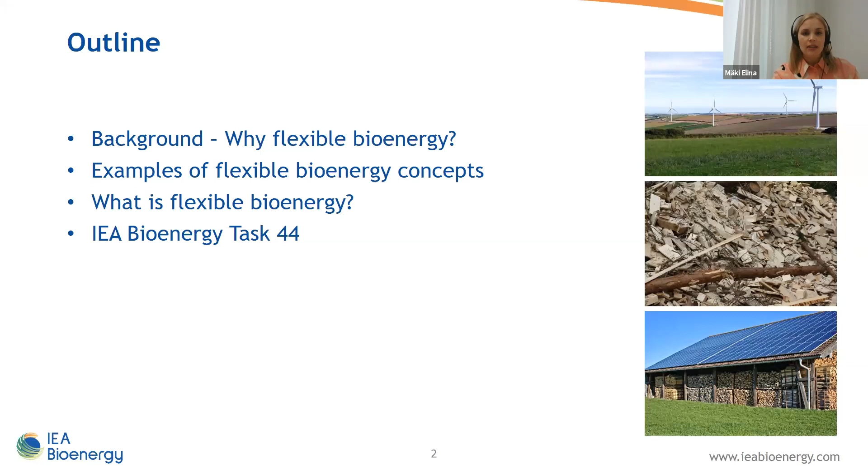So about the background: as we all know, the costs of wind and solar energy have decreased drastically over the past years. Over the past 10 years, the levelized cost of wind power has decreased around 70%, and the corresponding number for solar PV has been as high as around 90%.

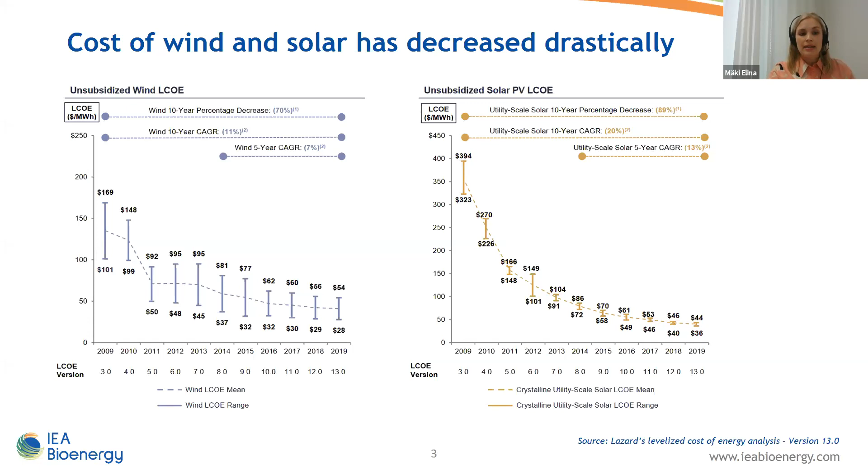The costs of wind and solar are approaching, or have even approached in some parts of the world, the costs of fossil-based generation. At the same time, the potential from renewable energy resources is really massive. This figure shows the offshore wind technical potential from the IEA Offshore Wind Outlook, and we can see that the estimated technical potential in many countries and regions is much higher than the actual electricity demand.

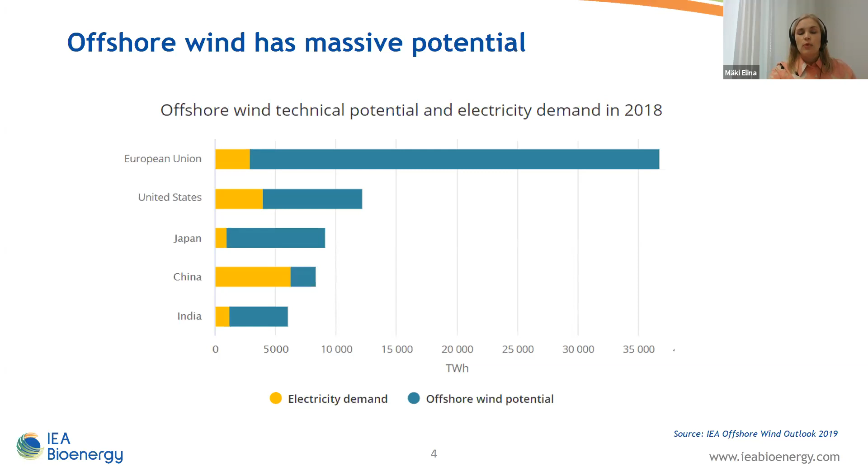So two things are happening at the same time: the costs of wind and solar power are decreasing fast, and we have a lot of resources available. But we have to keep in mind that the output from wind and solar is variable by nature and only partially predictable. What does this mean for grid integration?

In this figure by IEA, the vertical axis presents the variable renewable energy generation as a share of total power production in certain countries, and the coloring of the bars shows the grid integration phase in those countries. What we can read is that in countries where the share of variable generation is less than 10%, we are in phases 1 and 2 of grid integration, meaning the generation has no relevant impact on system integration, or we can utilize existing flexibility from the system.

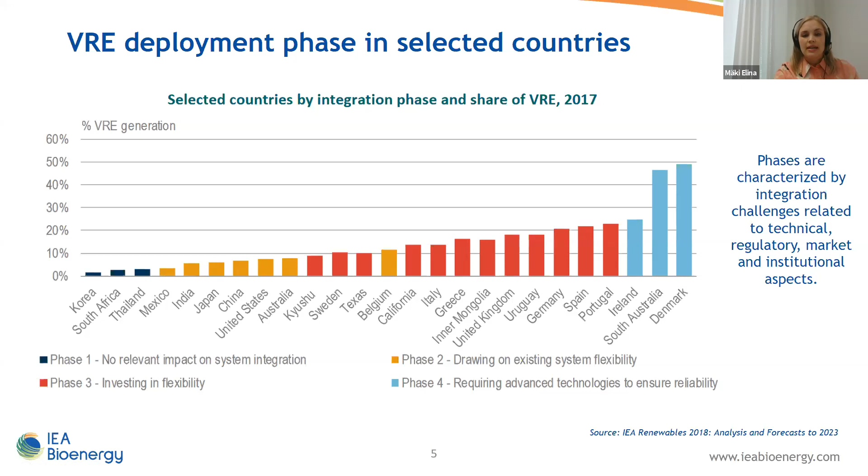But when we move to higher shares of variable generation, 10 to 20% or even 20 to 40%, we move to phases 3 and 4. This means we actually need investments in flexibility and new advanced technologies and approaches to ensure system reliability. What's notable is that this figure is from 2017, so many countries that were in phases 1 and 2 have already moved to the next phases. This integration topic is very relevant today.

We also have to remember that variability and uncertainty are not new things in the energy system. All power systems and energy systems have some inherent level of flexibility that can already balance supply and demand at all times. This is an example figure of demand in an example power system.

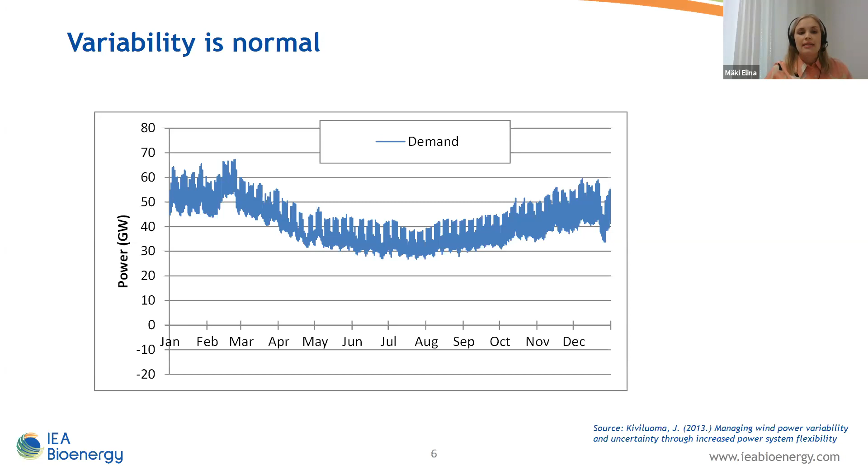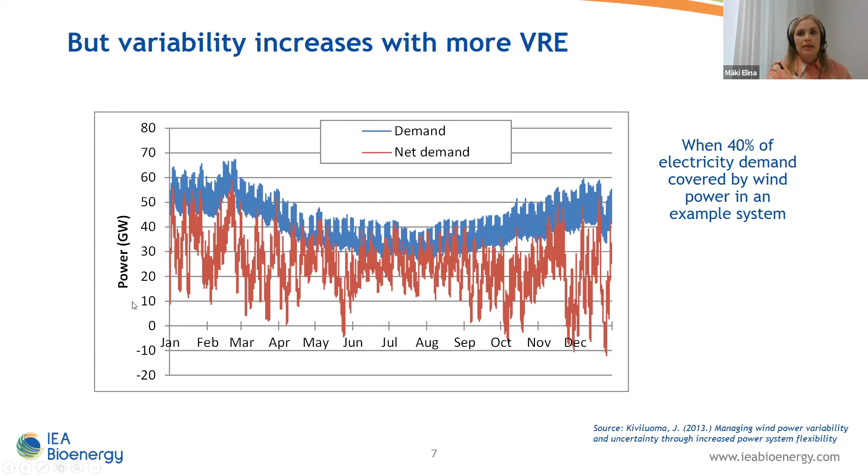When we move to a system with more variable generation, like one where we cover 40% of electricity demand with wind power, the increasing share of variable generation increases the variability in the system, which creates a greater need for flexibility. This means, for example, steeper ramps, lower outputs, and shorter peaks. This raises the question: how can we guarantee an uninterrupted supply of electricity in the system?

We actually already have multiple tools or measures for that. The power system has many components that can address flexibility today, like flexible operation, networks, flexible generation and demand, sector coupling, and energy storage. These are classified according to power sector components, with indicative costs shown, though those costs are really indicative since they depend heavily on the system and are evolving over time. There are a lot of opportunities, and likely we will need most of them to integrate increasing amounts of variable generation in the system.

But in Task 44, we are mainly interested in bioenergy and flexible bioenergy, and we can actually find it in quite many places in this figure. We have flexible generation, flexible demand concepts, sector coupling, and energy storage, where we have options to provide flexibility with bioenergy.

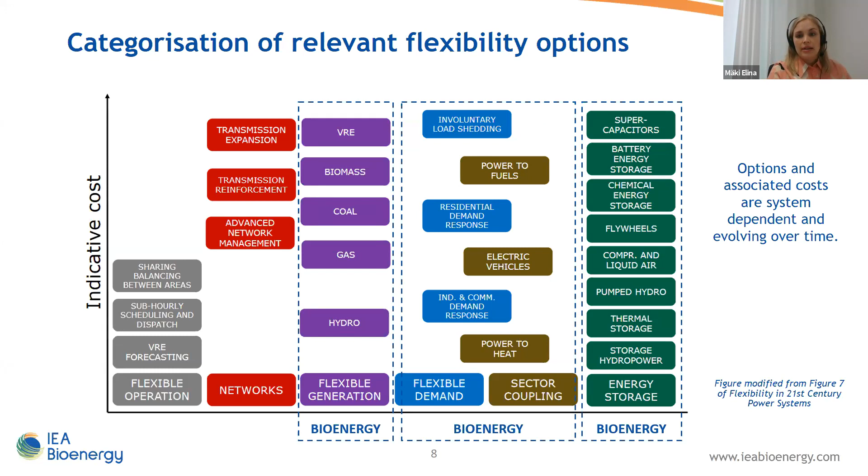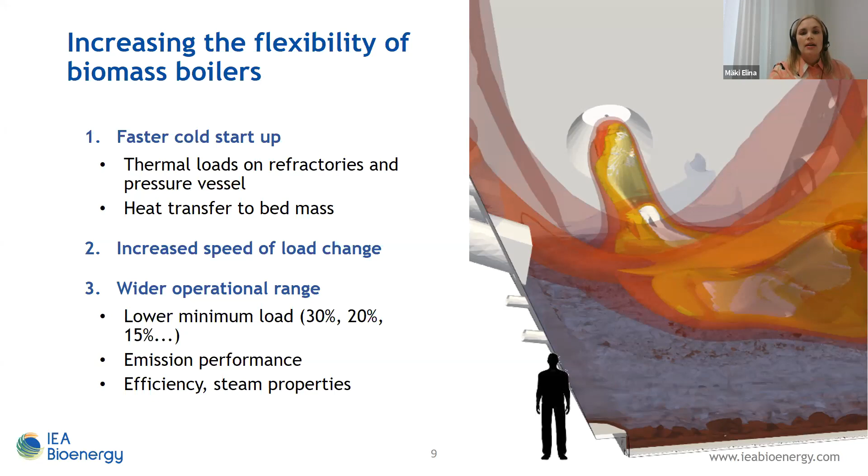In addition to technical aspects of flexible bioenergy, we should also think about profitable business models. In order to provide flexible bioenergy, we have to make the business cases economic, and we think that bioenergy has many unique features that can help in flexible provision with good economics.

Bioenergy can co-generate different products with flexible output ratios according to, for example, electricity prices. We can provide different combinations of heat, power, fuels, and other products. In addition, bioenergy is also the only renewable chemical energy source, and it's naturally easily storable both as solid, liquid, and gas. So we think that bioenergy has many features that can help provide flexibility in an economic way.

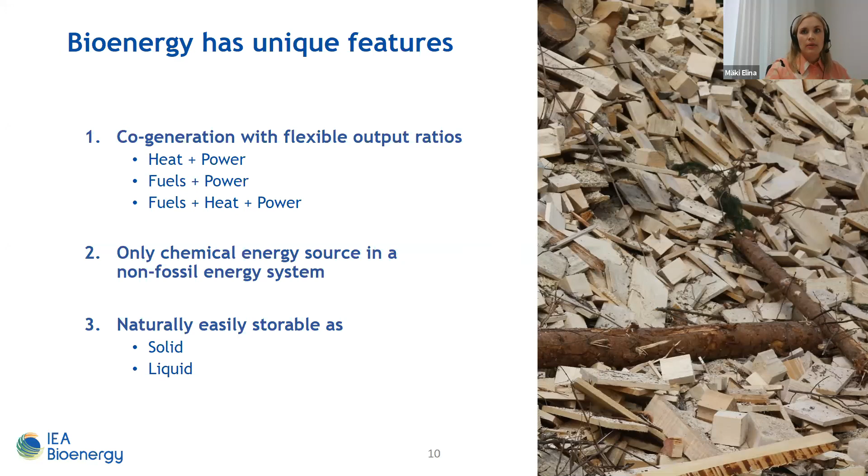Next, I will show you some flexible bioenergy concepts which we have been considering in Task 44. In these concepts, we have both the base load part, marked with blue color, and the flexible part, marked with orange.

This is an example of co-production of power, steam, and heat, where combustion represents the baseload production, and we can produce power and steam with flexible output ratio. This steam can be used, for example, for industrial drying processes or desalination, and market conditions define how much we need that.

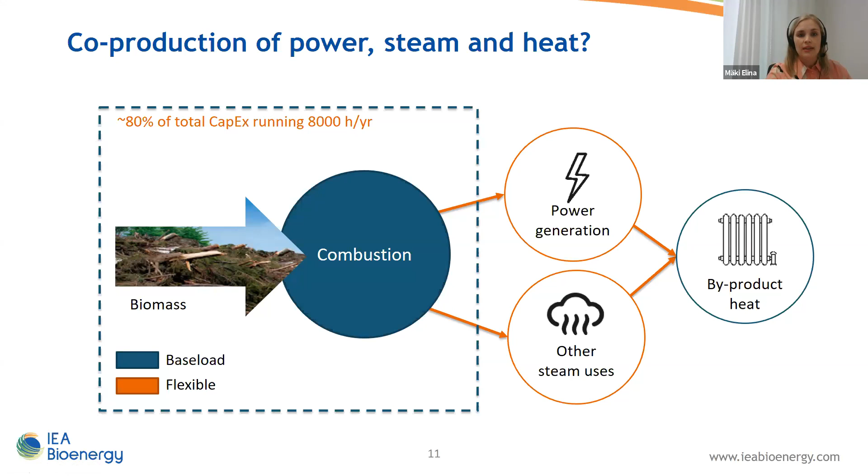The second concept is liquid fuels for peaker plants. The idea here is that we have biomass feedstock, like wood chips, which is already a renewable chemical energy storage. But if we convert that into liquid form, for example through pyrolysis, we can make it even more easily storable. With this storage, we can decouple the conversion process and the end-use application of the bio-oil, so we can produce electricity flexibly on demand.

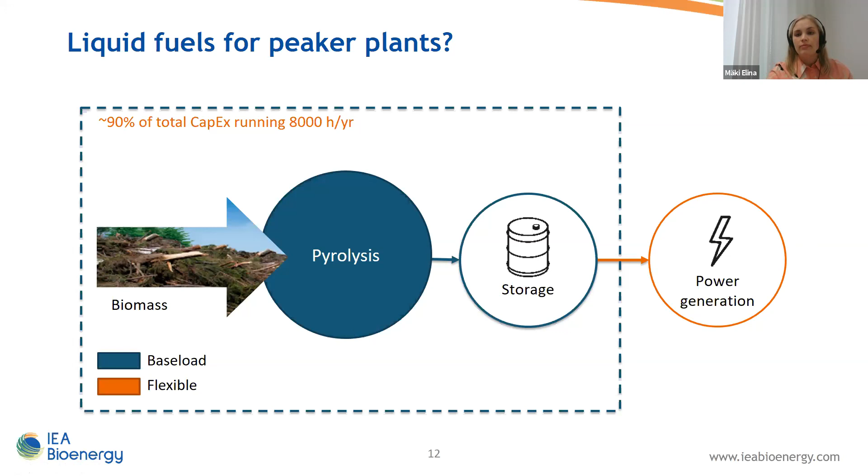The next concept is about co-production of fuels, power, and heat through gasification. Here we can produce power and fuels according to, for example, electricity price.

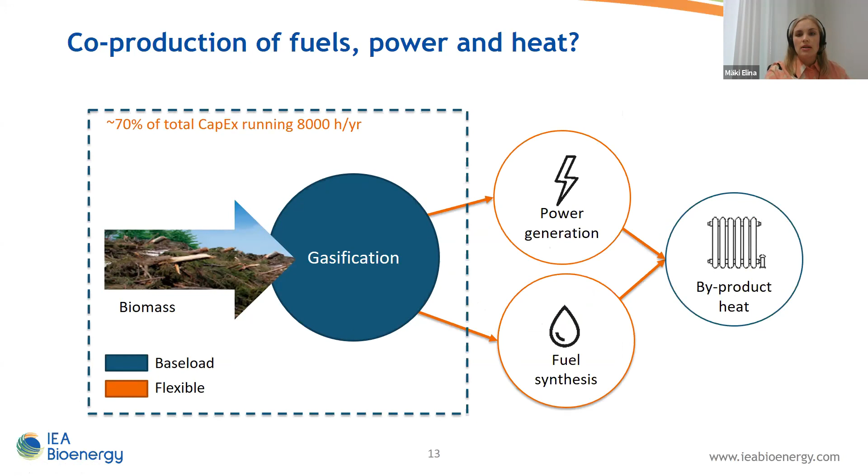The last concept is about demand-side flexibility from bioenergy. Here we are producing methane through anaerobic digestion, but we can also produce hydrogen from surplus electricity and use that hydrogen to boost methane production. That way, the methane actually works as a chemical energy storage for surplus electricity, for example from wind and solar.

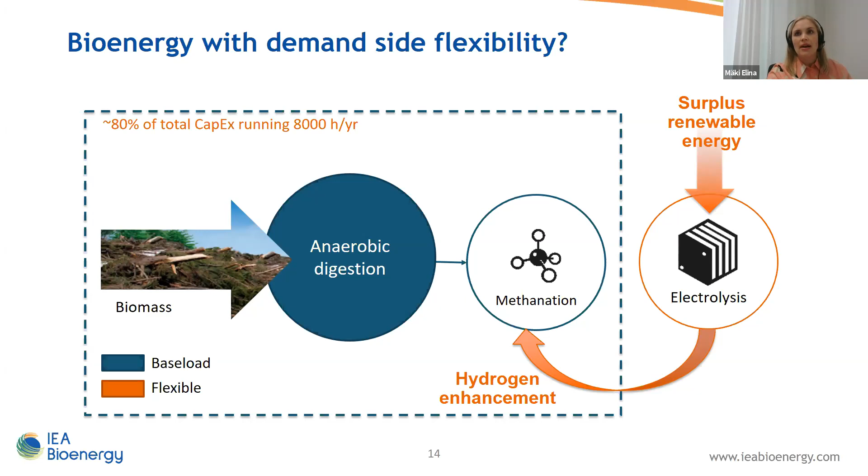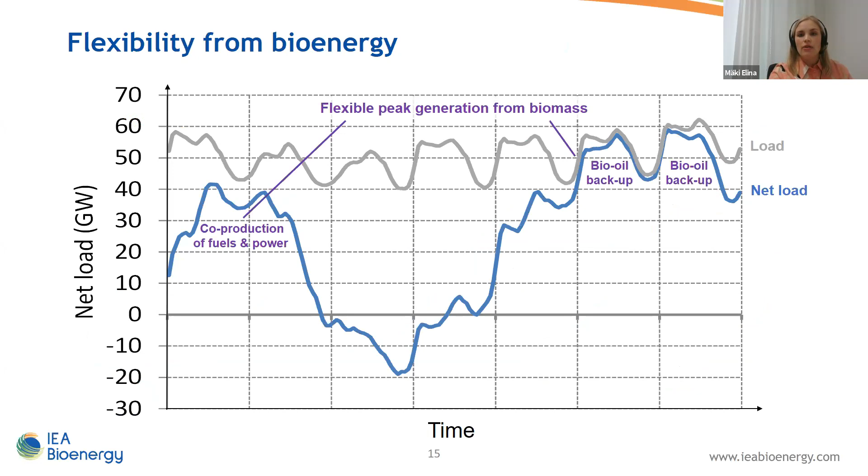As you can see from these different concepts, we have really different options to provide flexibility from bioenergy. Here you can see a qualitative representation of different options. So we can produce flexible peak power from biomass through co-production plants or in backup plants.

We can have flexible boilers, and we can produce hydrogen-enhanced biofuels. Furthermore, we can utilize the storability of biomass and then use these produced fuels during the times when we most need energy.

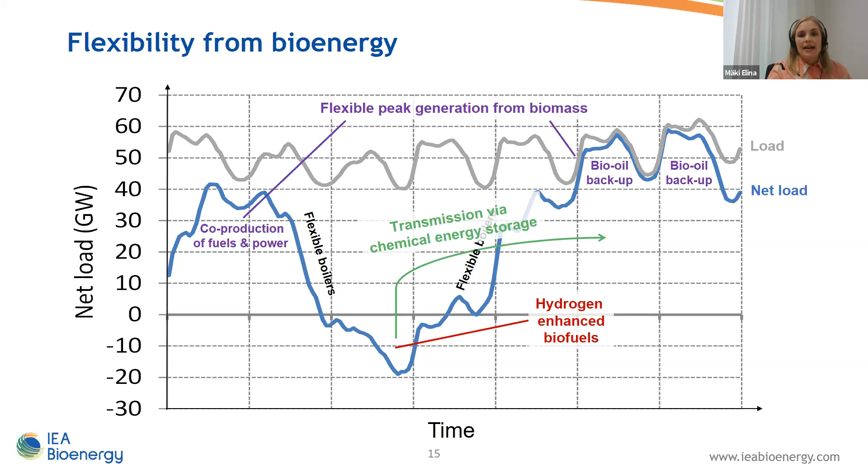As you can see, there are a lot of different bioenergy concepts, and they include very different dimensions of flexibility, like feedstock flexibility, operational flexibility, end product flexibility, and flexibility at different time scales. So what we found out is that it's really challenging to capture all these dimensions into one definition for flexible bioenergy. But we did our best, and where we ended up is a definition like this.

We have defined flexible bioenergy as a bioenergy system that can provide multiple services and benefits to the energy system under varying operating conditions and/or loads.

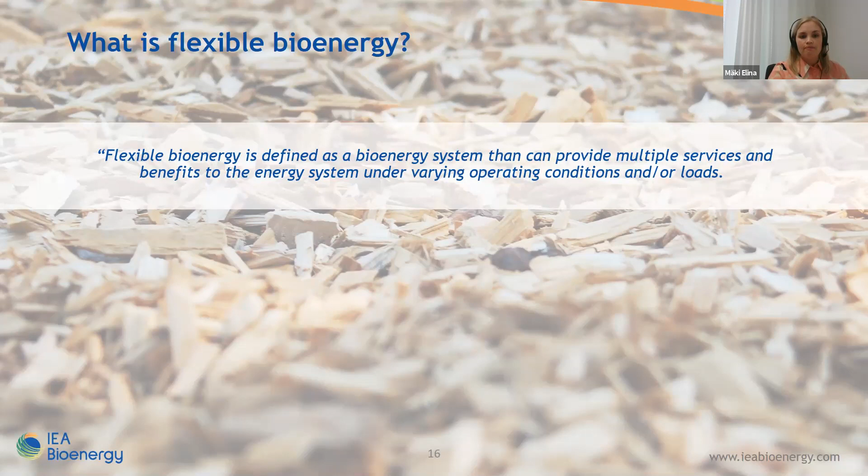This includes different examples: technologies that can provide grid stability for a power system with large amounts of variable wind and solar energy, and dispatchable production of energy and other products according to market demand.

Poly-generation systems combining the production of heat, power, fuels, and chemicals. It also includes long-term storage options, for example in the form of biofuels and biochemicals, and ancillary services to support system reliability. This is now the definition for flexible bioenergy which we are using in Task 44 to support our work there.

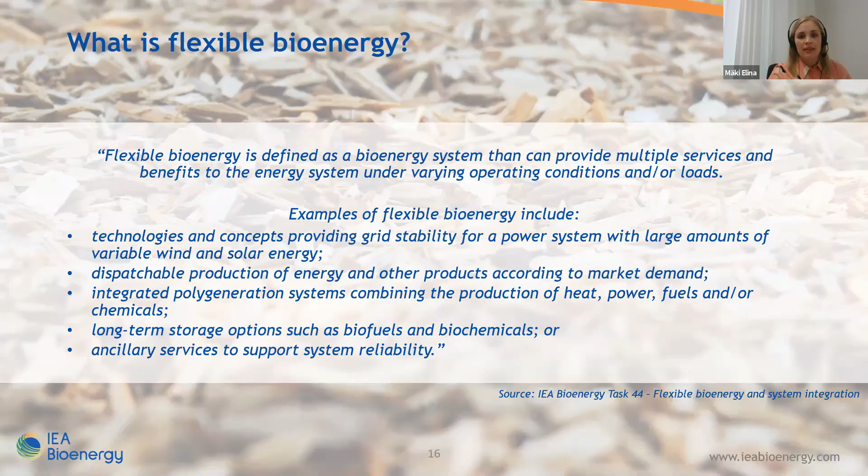Then to the end, some words about our Task 44, Flexible Bioenergy and System Integration. We are covering flexible bioenergy from different perspectives. The first one is the technical perspective, where we study flexible bioenergy concepts for supporting a low carbon energy system.

The next presentation will actually be about this, and we will soon launch a report on technical options to provide flexible bioenergy. There we will present, for example, different categories to provide flexibility.

The second topic is about acceleration of implementation, and we actually launched a report on that today: expectation and implementation of flexible bioenergy in different countries. You will also hear about the key findings of this report in this webinar.

As the last point, we are addressing system requirements for bioenergy concepts. At the moment, we have 9 member states, which are Australia, Austria, Finland, Germany, Ireland, the Netherlands, Sweden, Switzerland, and the US.

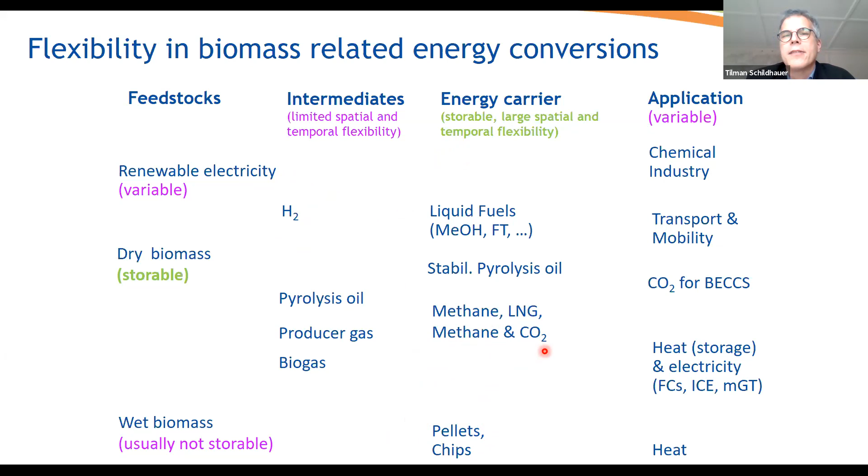For energy carriers, we see things we know quite well: wood pellets, wood chips, which are transported all over the world. We have methane or liquefied natural gas, maybe some mixtures of methane and CO2. There's stabilized pyrolysis oil, and then all kinds of liquid fuels like methanol, Fischer-Tropsch diesel, and things like that.

As Elina already showed, we have these different dimensions of flexibility. There's long-term flexibility where we want to convert bioenergy into something that can be stored as an energy carrier. But we also have two other dimensions, positive and negative, on the electricity system: either supplying electricity when the system is short, or taking electricity up when there's too much, to convert it into something storable for later use.

So these are the three dimensions, but we also have different levels. We have technologies which already exist—they work technically and there's an economic business case, so they're applied to a large extent. We have emerging technologies, usually demonstrated technically, so we know they work, but they're not applied much because there's no business case yet, or it still has to be organized. And then there are ones still under development.

I want to walk you through what is already there, what could be realized in relatively short time if we give the right financial incentives, and the things which really still need more time for technical development.

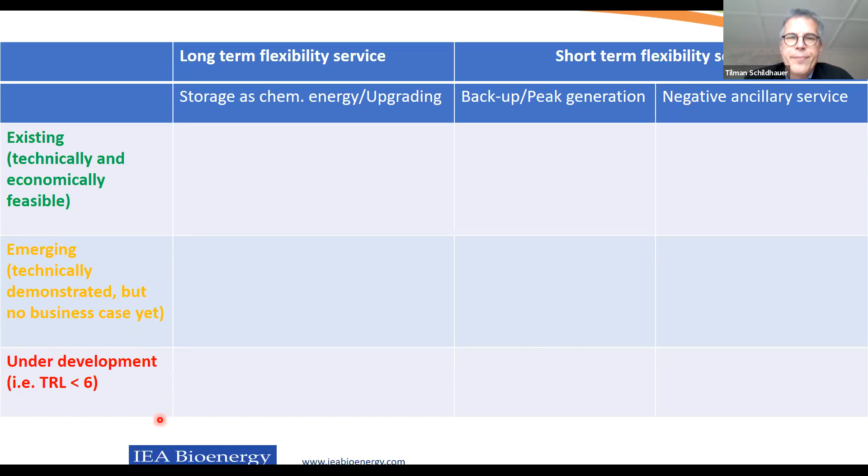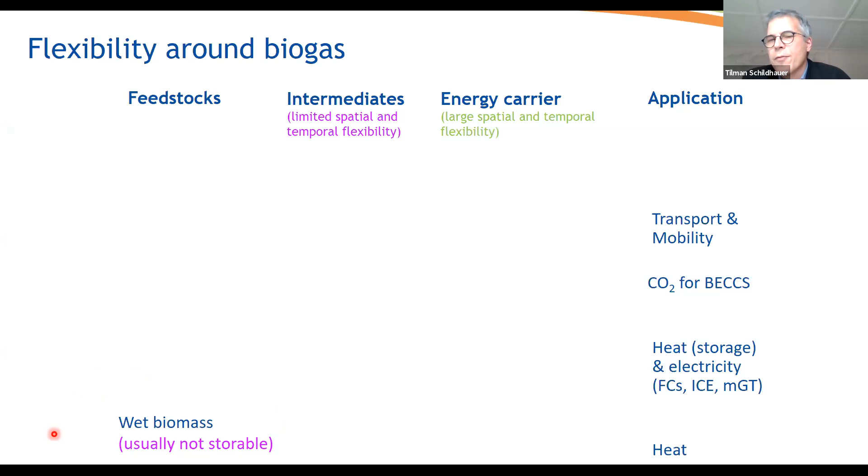Okay, let's start with biogas. We start down here with wet biomass—that could be sewage sludge, manure, or leftovers from the food industry. The first thing we do is create biogas.

This is actually something which would happen naturally anyway—if you just dump it somewhere, it might produce methane anyway. But we now do it in a kind of controlled environment, more of an agricultural one. This is how it usually looks close to a wastewater treatment plant.

We have this anaerobic digestion, and we produce a mixture of methane and CO2. This is done all over the world—we have way more than 10,000 plants. Some of these actually have storage capacity for the raw biogas of several hours, maybe half a day or so, and this storage capacity is important later to give us some flexibility.

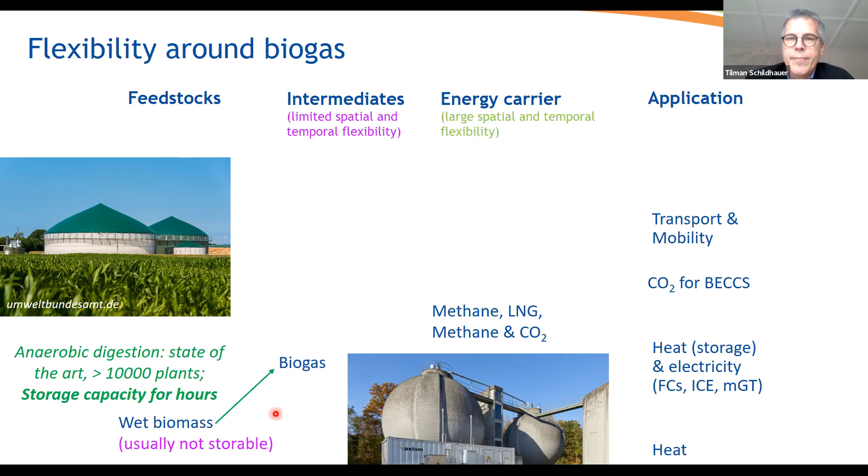Now, once we have the biogas, we can do different things, shown here. There are two things competing with each other. One is I take the raw biogas just as it is, do a little gas cleaning, and then go into a combined heat and power plant—usually something like an internal combustion engine, like this one, where we produce electricity and heat.

These things are really widespread—we have many of them, several thousand. They can ramp down relatively fast within minutes, and they're very flexible, so you can go from 0 to 100% load. That happens at many places.

Still, we have to say that most of them are not operated as flexibly as they could be technically, because for financial or economic reasons it's more attractive at the moment to run them more or less base load, 100% all the time. But together with the possibility of biogas plants to keep the gas for some hours, that could actually become a very fast implementable solution for peak or backup generation of electricity.

The other thing which is done at many places is biogas upgrading. We take the biogas and want to inject methane into the grid, because the grid contains mainly methane. There are injection specifications we have to fulfill, and the most important one is that we have to decrease the amount of CO2 a lot from the biogas to produce biomethane. There are different technologies to do that.

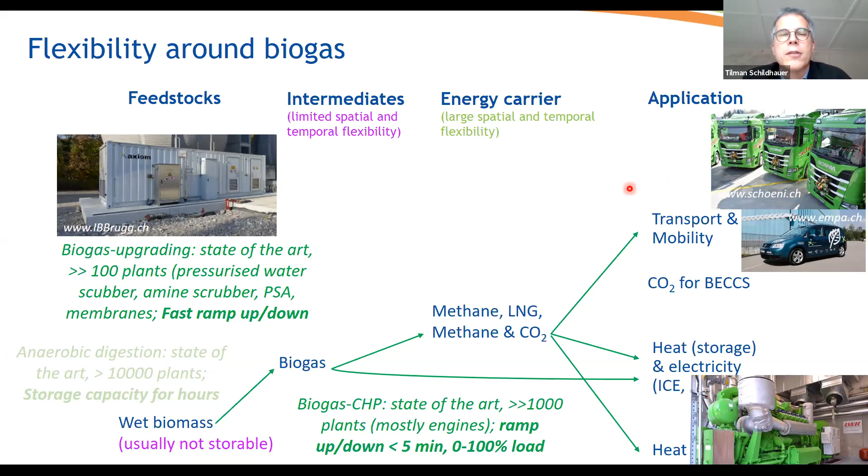If we have additional electricity that we cannot use where it's produced, and cannot transport away due to limitations in the electricity grid, we might want to produce hydrogen from it by electrolysis and add it to the raw biogas. That would allow us, instead of separating the CO2, to convert the CO2 into additional methane. So from the same amount of biomass feedstock, we can produce 65% more methane. This is quite attractive, but you need that hydrogen.

Technically it's possible, so we have several plants at TRL 8. There's a 3 megawatt plant in Germany, a close to 1 megawatt plant in Switzerland, and a similar one in Denmark. There are several plants, but not more than 20, many of them even smaller, at technical readiness level 7 to 8, both on biological or catalytic methanation. When they are warm, they can start up within 20 minutes, and they have some load flexibility, especially the biological one, which can ramp from 0 to 100 in principle.

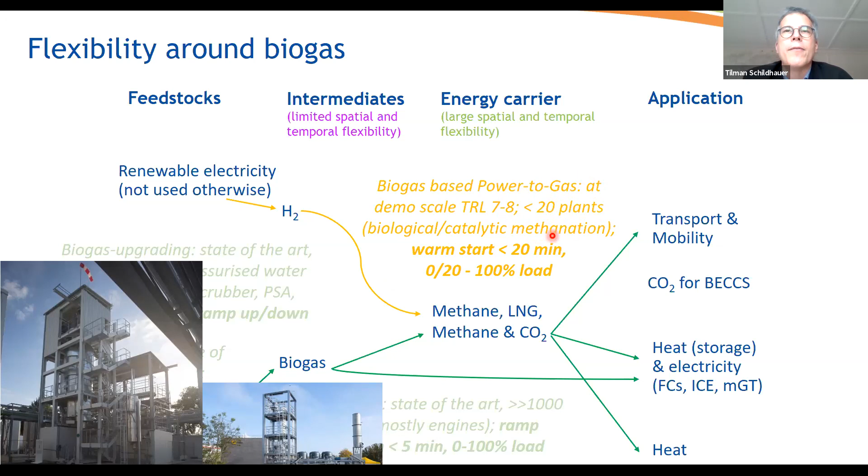What you see in yellow corresponds to the small number. It means technically it's more or less possible, but at the moment there are very few places where you can run it under commercial operation.

There's also an addition: if you take up hydrogen, that would be the negative service to the electricity grid. But at the moment, when you don't have the additional hydrogen and you want to feed methane into the grid, you have to separate the CO2, which in principle would then be available for sequestration. That's a source where you can capture CO2 and bring it to a sequestration place, achieving real negative emissions. So a biogas plant could, in winter when there's not enough electricity and no hydrogen, be used for negative emissions. But in summer, or during very windy times when you produce more electricity than needed, you produce hydrogen, and instead of sending the CO2 to sequestration, you use it to produce additional methane. This gives quite some flexibility to one biogas plant.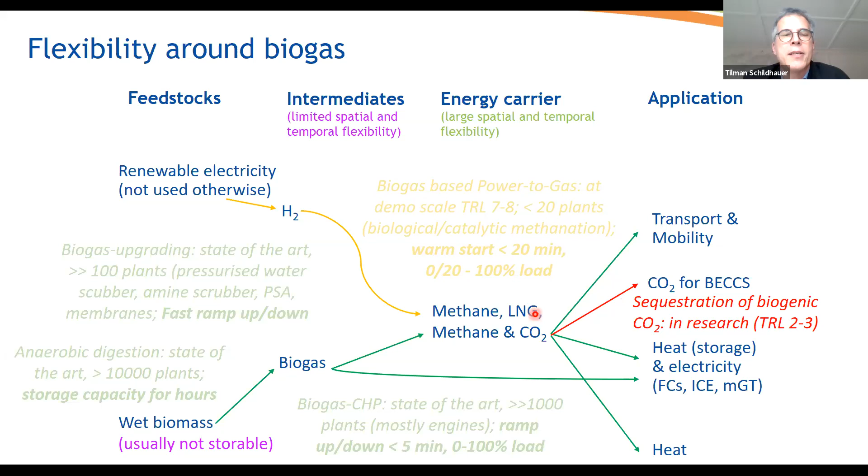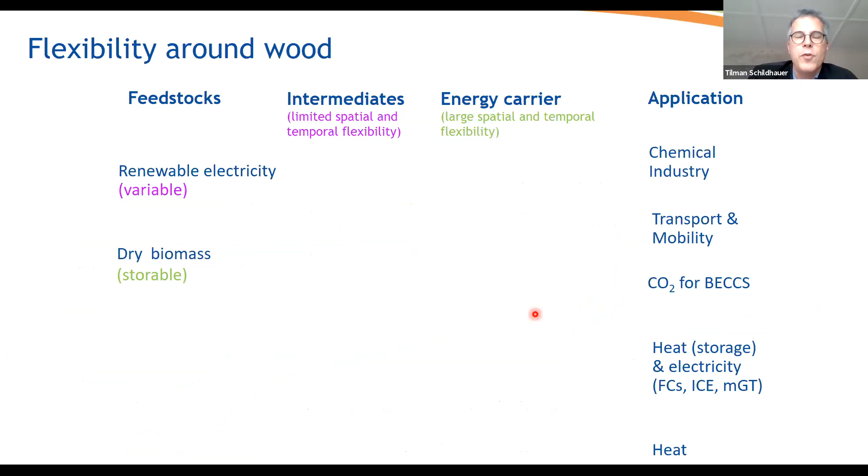That was the biogas part. Now I'd like to look at what we can do with wood, mainly dry biomass. Most of the wood used today is immediately used for heating. That's the very first use of it, and it has some flexibility in itself, because you can stop it or start it again, and there are systems for ramping the heating up and down if needed.

But if you look more into the overall energy system, what comes into the picture is combined heat and power plants based on wood. Most of them are based on combustion of wood, operating a steam turbine or an organic Rankine cycle. There are a few first plants, usually relatively small, which run on pellets, where we have gasification followed by a gas engine. So this is combustion with a steam cycle versus pellet-based gasification CHP, both examples existing in Switzerland.

What you can see, if you have a combustion part or a gasification part, they are not flexible, so you cannot completely stop their operation easily, but you can at least go to some part load. Once you have the gas, you could either burn it or produce electricity in an engine. And if you have a steam cycle, you're always able to bypass the turbine, which makes it very flexible to produce electricity relatively fast.

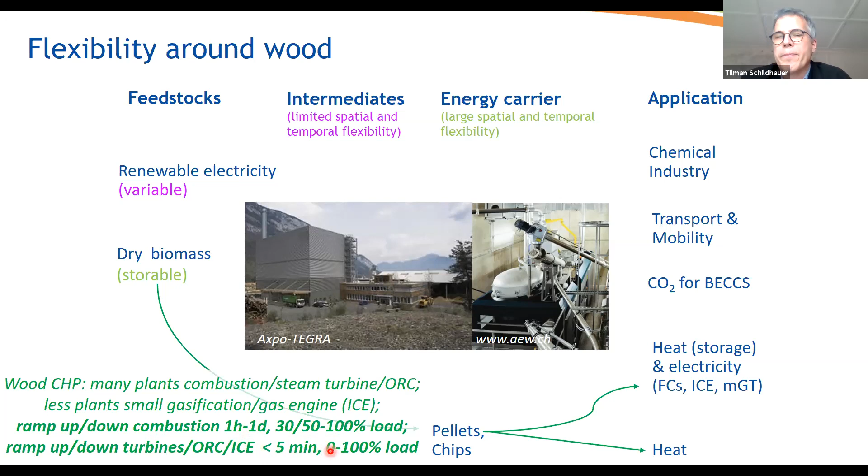Another option with dry biomass is to undergo pyrolysis. This photograph is from the Netherlands. This has now more or less reached commercial status, which is why I made this a yellowish and green arrow, because some of these technologies are more or less commercial, while others are still demonstrated but not yet commercially applied.

As I mentioned before, pyrolysis oil is not necessarily storable for too long. So the next step would be a kind of stabilization with hydrogen, mainly to saturate some double bonds and remove some oxygen from the oil, which also improves the quality quite a bit. This way you get something very stable and nicely transportable and storable, which could later be used for peak generation. In principle, we could also go from the pyrolysis oil to transport fuels, or even produce some intermediates for the chemical industry.

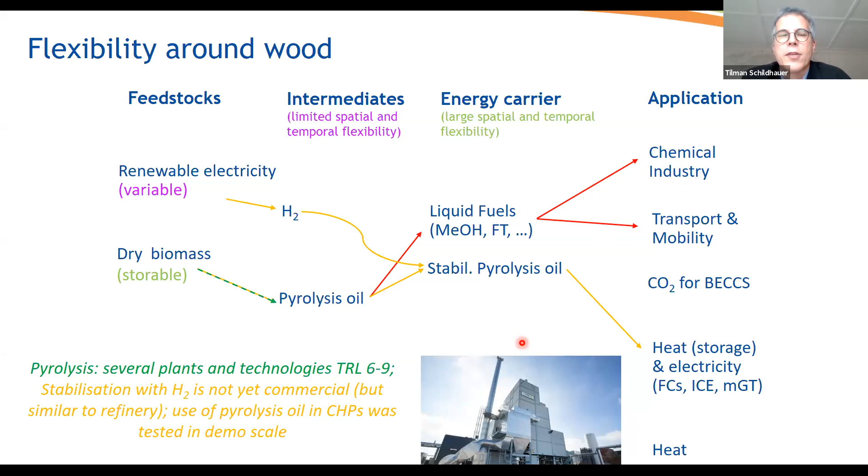Another thing we can do with wood, which is very versatile, is have it undergo gasification. Here's a photograph of the gasifier in Austria. Once it's gasified, you can operate a large gas engine. There are some of these around, some really in large scale, several megawatts, and technically they work quite nicely.

The ramp up and down of the gasification again takes a day or so, but the gas engine itself is very flexible. Most of them operate commercially, but the situation became more difficult in recent years because the wood price is going up while electricity prices on average are going down a little at certain times.

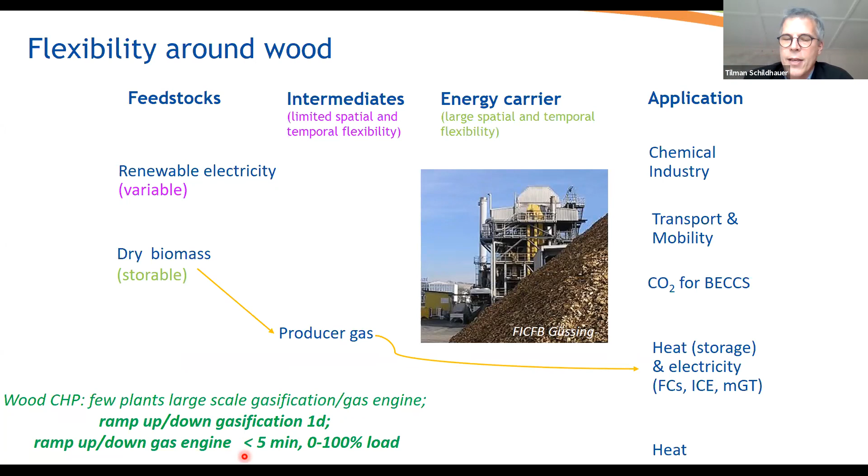But you can do more with producer gas. You can actually produce either methane or liquid fuels. For methanation, I show two pictures here: this is the Gobigas plant, unfortunately the lower part is cut away, but it's a very large plant, 32 megawatts thermal input. And this is a demo plant in Austria, around 1 megawatt input.

Again, the gasification part can ramp up and down within a day or so. Such a methanation plant, if it's warm, you can actually start the methanation within 30 minutes and produce methane which more or less fulfills the injection specification.

Another nice picture I wanted to show is this plant where we have a torrefaction step in between. We have an entrained flow gasifier, very large scale, which produces syngas that is then converted to liquid fuels in this plant in the northern part of France.

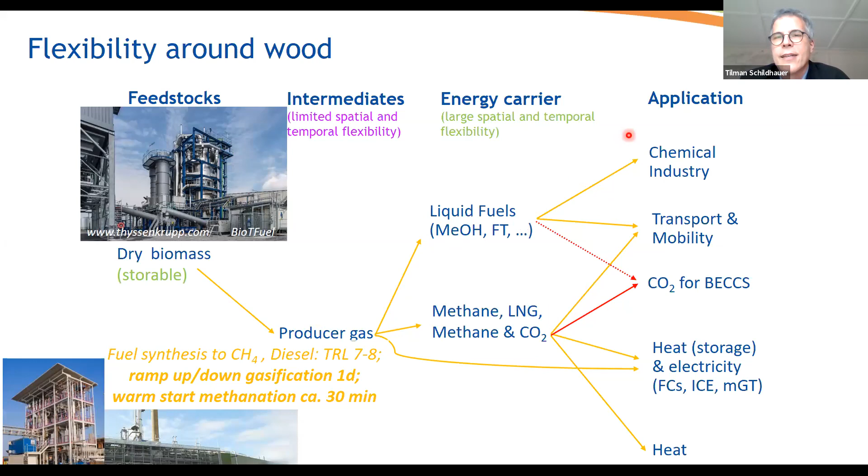From both processes, because biomass contains oxygen and these fuels don't, there's always some CO2 produced, which in principle could be used for negative emissions. Technically it's possible, but it's not yet done. All the other processes are also still in the demonstration phase. It would also be possible to enhance biofuel production, for methane, Fischer-Tropsch, or methanol, with hydrogen. It's fully obvious that it works technically, but it has not yet been tested at large scale or demo scale, so some research is still needed.

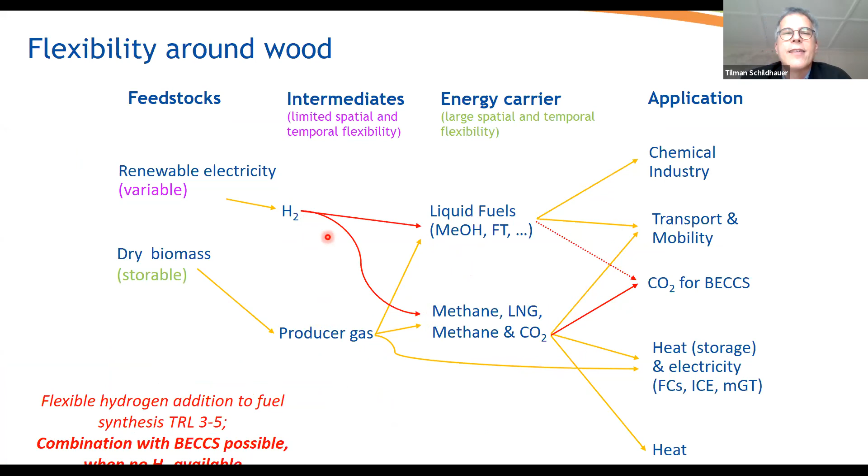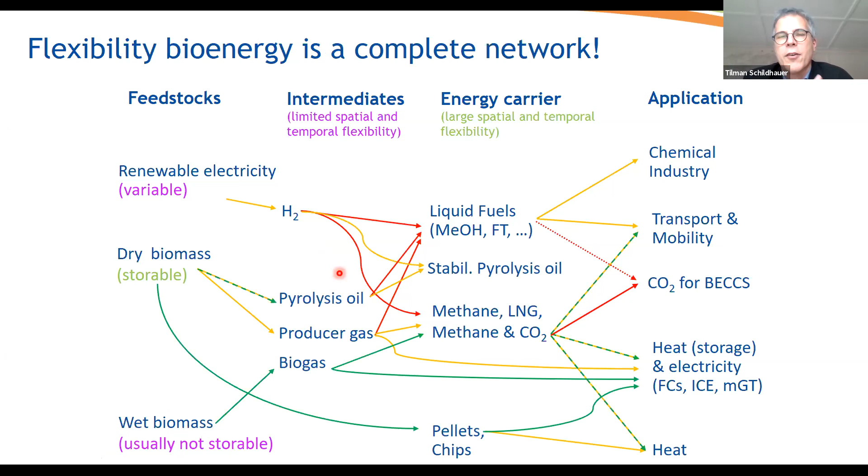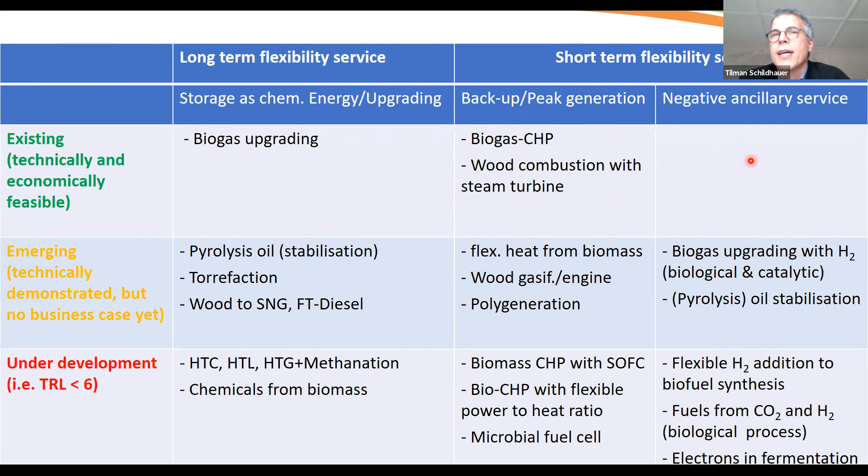That actually brings me a little bit to my summary. So we have many well-developed technologies, and most of them have been demonstrated.

Besides combustion of wood, there are only a few business cases which really work, starting with waste streams. If biogas is produced from waste streams, which you anyway would have to take care of, now you produce something useful from it, because you cannot just burn it. And producing electricity works at many places.

We have to keep in mind that in most countries there is some support scheme in place to have electricity from biomass. So it's supported financially, and if you want to use it in a flexible way, how we will need it in future, it means you need additional support. You need special incentives to really operate them in a flexible way. At the moment, most of them have the tendency to operate in baseload because it's more attractive from an economic point of view.

With wood, it's especially a problem because you have combustion as an alternative, and there are many fossils which actually can be used as alternative feedstock. So the business cases are not that easy. We think flexible hydrogen addition to fuel synthesis can make a lot of sense, but it's under development.

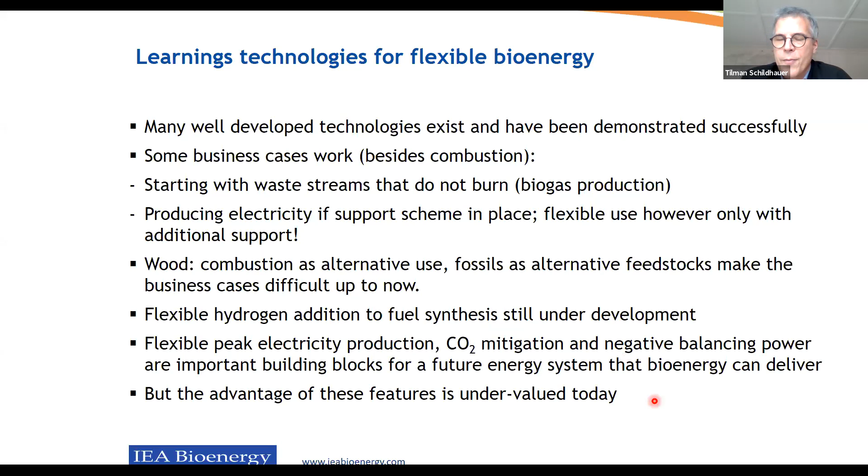To sum all that up, and this is more or less my key message, are the lower two points. So we can do flexible peak electricity, we can do CO2 mitigation, and actually even negative emissions. We can do negative balancing power. All that we will need in the future energy system, and bioenergy can be part of that. However, at the moment, these features are not as highly valued or esteemed as you would appreciate. So there are too few incentives at the moment to really make that happen in reality.

And with that, I'm at my advertising point. There will be a report on all these technologies where you can look up all the details on the different technologies. Our goal is to deliver that somewhere during spring. I have to thank all my colleagues in our own task, but also from the technical tasks on combustion, gasification, biogas, and biofuels, who were kind enough to do some proofreading and give us advice. I would like to thank you for your attention.

Tilman, thank you very much for your presentation. I think that has raised several questions, so maybe it's good to go into them. The first refers to the development status of different technologies. A specific question is when to expect gasification with capacity of 100 megawatt plus. So biomass gasification, do you have an idea on that?

Yeah, so the first thing about large scale biomass gasification, there's always a logistic problem or challenge, let's say. If you see a plant of this size, it will be somewhere in Scandinavia, somewhere with a big harbor around, so that you can transport all that wood to these places. Scandinavia has this vast experience with paper mills at very large scale, so I think this is the place we will see it first. Actually on the continent, in the middle of the continent, it's very difficult from the logistic point of view to have plants of more than several 10 megawatts. I guess this is the first starting point.

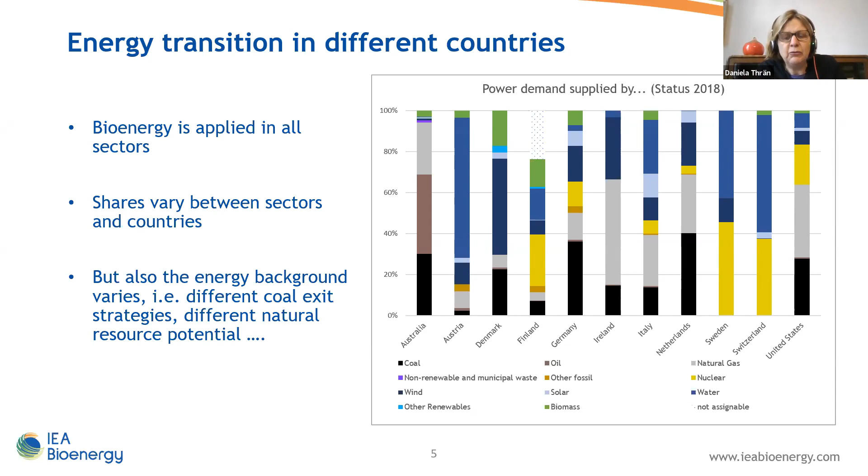We also have seen that most of the countries have coal exit strategies, some already by 2025. So there's an overall expectation that the relevance of flexible energy provision, and also flexible bioenergy, will increase during the next decade. The most ambitious coal exit strategies are already to be realized during the next 10 years.

Just to remind you, level 1 of this IEA classification means no relevant impact of system integration. Level 2 means drawing on existing system flexibility. Level 3 is investing in flexibility. Level 4, advanced technology is necessary to ensure reliability, and level 5 is when we have a fluctuating or variable renewable energy surplus for days and weeks, or maybe in the longer term even seasonal.

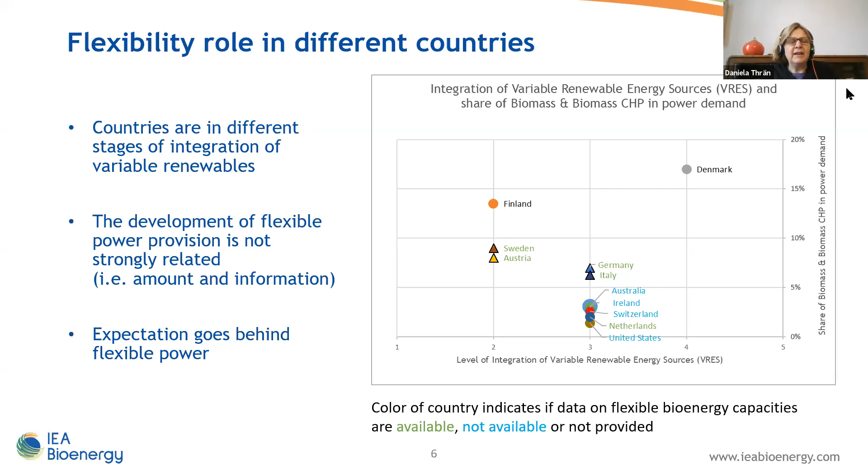So we see the countries are in different stages of integration of variable renewables. We do not see a strong relation to the power provision system transformation. What I'll show you in the next slide is that countries don't only expect flexible power, but also other benefits. We asked the countries: what is your expectation or reason to support flexible bioenergy?

And you see here, very much in line with your expectations at the beginning, it is about substituting fossil fuels—meaning acceleration of the energy transition—but also offering more flexibility for the energy system in general, supporting biofuels, supporting CCS, heat use, reducing energy costs, or supporting the system transformation.

This is, of course, not so surprising, because our definition is that flexible energy can provide multiple services and benefits to the energy system under varying operation and varying loads. We've also seen that expectations of these additional benefits from flexible energy go beyond the energy system—for example, a prolongation of the value chain in the agricultural sector or in the industry sector.

So what about the hurdles? Here I come back to your last poll, and again you are very much in line with the feedback from the country experts. What is seen in most countries as a big hurdle is the lack of regulation and policy.

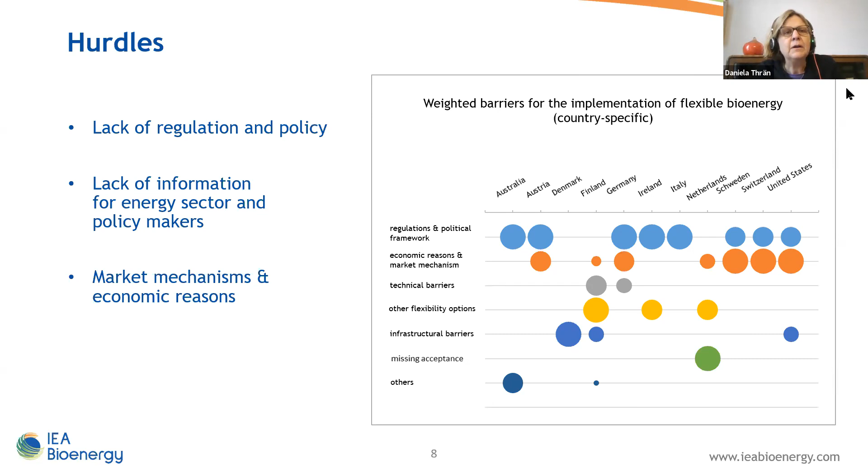Okay, so in the end, then we saw there are really many different approaches and ideas how and where to use flexible bioenergy.

To get a good idea what is really possible, we also have a chapter on best practices. We collected more than 30 best practices from many countries. I just give you a selection here.

The examples cover temporal flexibility, to ramp up and down, and also product flexibility to change shares of products and also switch between products, as we have heard already from the previous speakers.

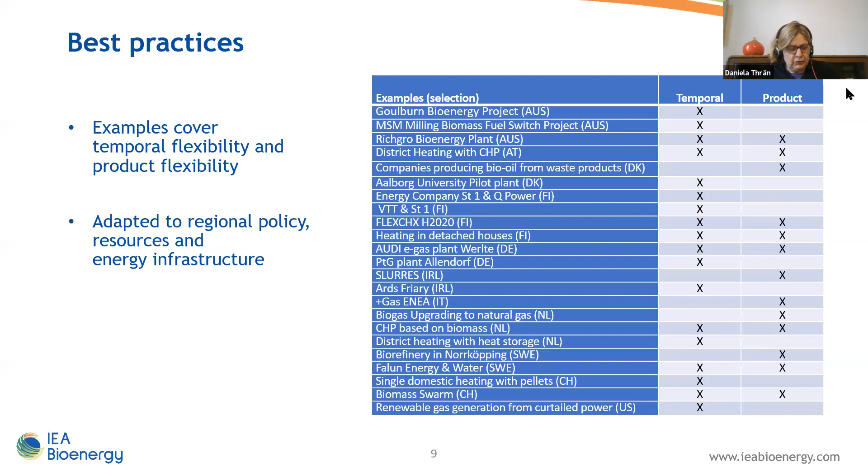A conclusion of our exercise is that best practice is very strongly embedded in regional circumstances, like regional policies and resource availability, but also it is a central question about energy infrastructure. This does not only mean grid and power infrastructure, but also, for example, district heating systems, gas grids, and natural gas grids, etc. So this leads me to the conclusion.

When we did the whole exercise, one conclusion was that terminology and definition is still not very established. So what is the whole picture of flexibility caused a lot of questions, and we hope we can improve this situation with our IEA Task 44 work.

We have seen that chances and barriers for integrating variable renewables are seen as the main chance, or this interplay with solar and wind, but it also goes beyond this field. The biggest lack is a regulatory policy framework and adjusted financial regulation.

But we have also seen, and this is very much linked to my first point, that many stakeholders need better information, for example politicians but also energy sector related stakeholders, to really understand the chances for flexible bioenergy. We see best practice examples as a very promising starting point for acceleration of implementation.